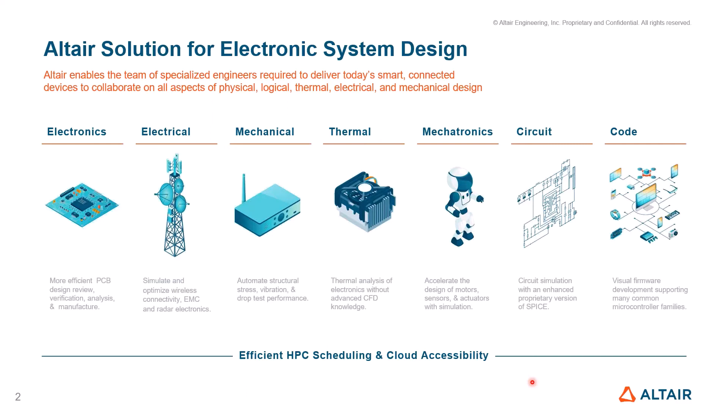On the mechanical side, we can do structure analysis, stress, vibration, drop test, thermal as well with both forced cooling and natural cooling, mechatronics, and circuit analysis through our Activate tool via SPICE coding. And also we can generate embedded coding for controllers. All of them support high-performance computing as well as scheduling and cloud accessibility of the simulation tools that we have.

So focusing mostly on electromagnetics here, we have tools for antenna design, which we're going to cover today, and also antenna placement and coupling, but also virtual drive tests, flight tests for platform and connectivity, even ADAS simulations in automotive, electromagnetic compatibility through cable modeling, radiation, shielding, radio and radar coverage and planning, including scattering and RCS. That's also another webinar we're going to do.

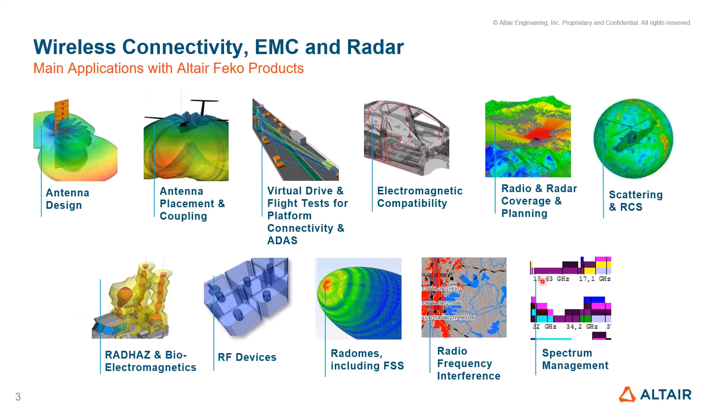The capability includes radiation hazard, bioelectromagnetics, RF devices like waveguide circuits, and radomes including FSS. This will be covered in the radome webinar in this series, as well as radio frequency interference and spectrum management. So you can see that we can not only do very detailed antenna design and placement, but also broader system design using the tools that we have.

The focus today is on antenna placement, which is a very critical thing in antenna design in a communication system. Where you place the antenna could change your antenna radiation pattern. That means your system design should take into account the pattern as it is placed, but also you should find a place where it performs well for your communication requirements.

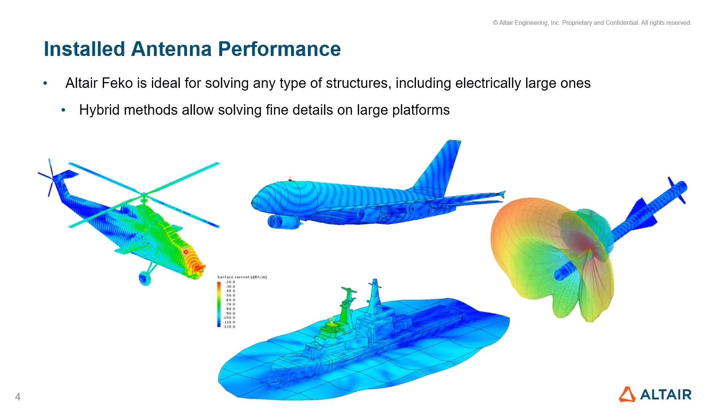Feko has been able to do this right from the beginning. We're an industry standard in antenna placement because of the multiple solvers in the Feko software suite, including FEM, the finite element method for highly inhomogeneous objects, finite difference time domain, method of moments, and MLFMM. These are full wave solutions, but there are also asymptotic solutions like physical optics, large element physical optics, geometrical optics, and uniform theory of diffraction, which are very useful as you go to larger electrical sizes in analyzing radiation patterns.

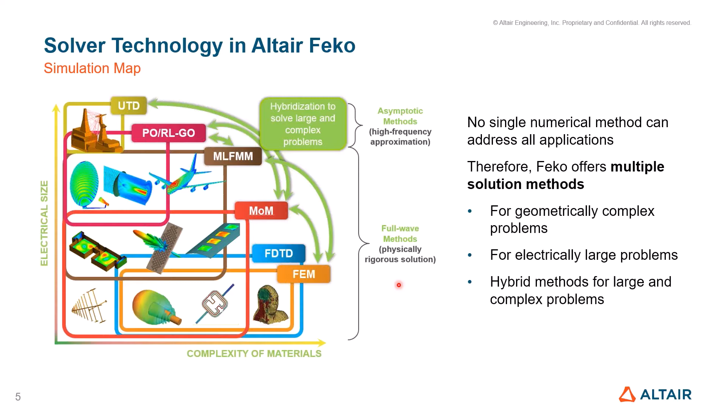They're also hybridized, as you can see with these arrows. FEM is hybridized with method of moments and MLFMM, and method of moments with physical optics, RL-GO, as well as UTD. We also have an iterative method where MLFMM is hybridized with physical optics, so you can use physical optics on one part of your problem and MLFMM for the other part, using an iterative method to converge the coupling between both parts. This is one of our key strengths in the industry, not only for designing antennas, but also for antenna placement analysis.

All our solvers are parallelized on multi-core CPUs and multi-CPUs with shared memory, and large-scale clusters with distributed memory. We also support out-of-core solution if needed. You can see that the scaling done for one of our solvers goes all the way to 960 cores with a speedup of 10 times compared to 60 cores, scaling very linearly over the CPUs and cores.

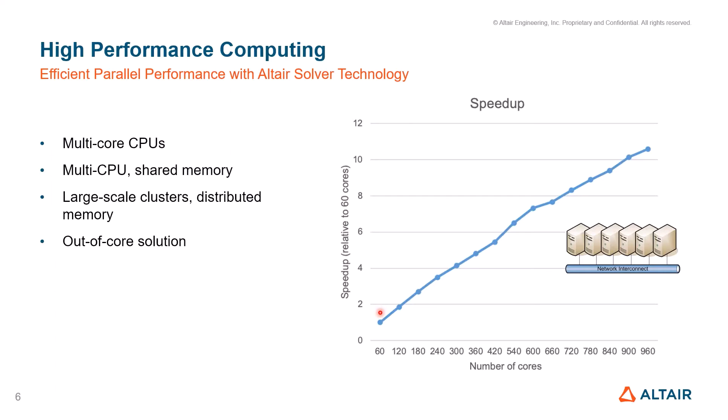One thing that is normally needed for many of our customers is that when the platform models come to them as antenna engineers or electromagnetic engineers, they come from mechanical models, from mechanical people doing the stress analysis and those kind of things. Those models come to us for antenna placement.

If it is not too complicated, we have tools in CAD Feko to fix them, some small things like CAD fixing tools. But of course, if it is too complex for CAD Feko, we have a tool in the Altair portfolio called HyperMesh that can do CAD healing and mesh healing, and can deal with very complicated structures and defeaturing.

We recently introduced in HyperWorks a profile called the Feko profile that, in a way, understands what Feko needs and translates the mesh in a way Feko can read, including the material properties and all those things. So that's an additional benefit we have in Altair.

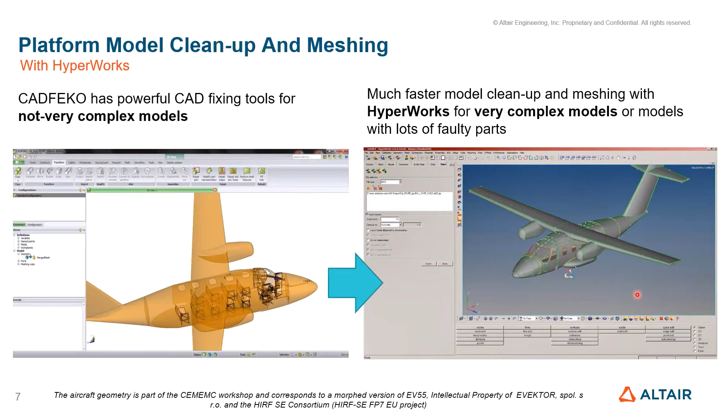Of course, with our licensing system, you're not buying these tools separately. You have access to all these tools at your disposal when you have an Altair license. So this is actually the first step anybody goes through when they have a very complicated geometry, a tool for antenna placement.

And some few examples of how our customers have been successfully using Feko for their platform installed performance. For example, this is from Airbus Helicopters. One of their expert users gave a video testimonial on how they are using Feko to optimize not only placement of antennas for the communication system, but also use of composite materials.

Feko allows for use of composite materials for your platform structures. So how do you place your antenna and also make sure that the antenna works correctly on a composite structure can be analyzed using Feko, and has been successfully done by Airbus Helicopters.

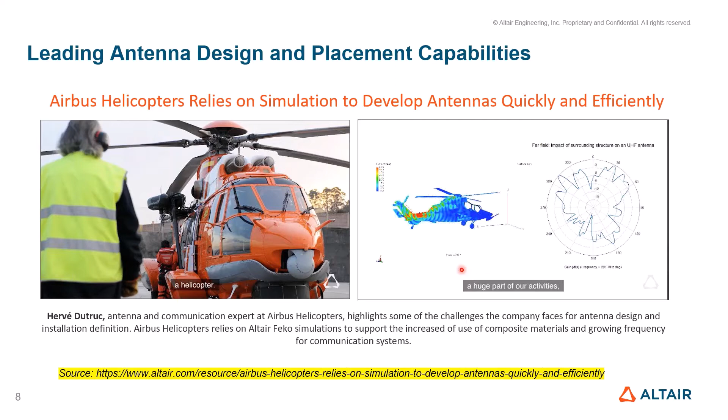Here in the US, at Northrop Grumman, one of our longtime users, Scott Burnside, has successfully used not only Feko but also our other tool called HyperStudy. This can be used for what I can call a machine learning approach for design and optimization, and Scott has been able to do this very effectively for his work.

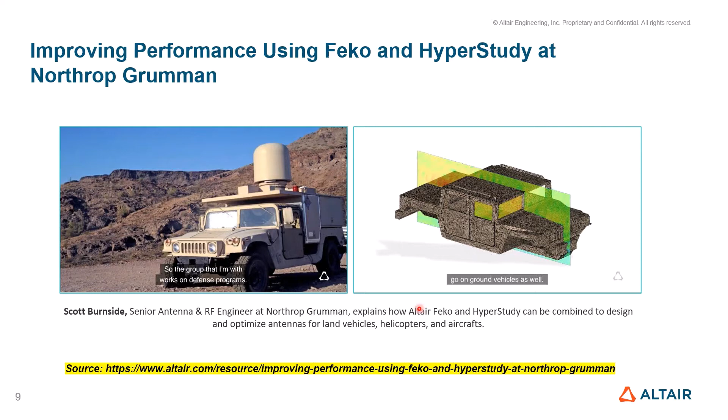And of course, he has given us a video testimonial at this link that you can access. We can share these links with you and also the slides, so you can take a look at these video testimonials.

There's also a paper published in 2012 by Saab on computing radiation patterns using a Feko model, but also doing scale model measurements and then comparing simulations with the measurements. You can see that the blue line here is the simulation and the black line is the measurement, and you can see quite nicely how it is tracking in different planes.

This is the azimuth plane, and a vertical cut, and a vertical cut in another plane here. All of them are validated well by Saab, I guess, with their scale model measurements.

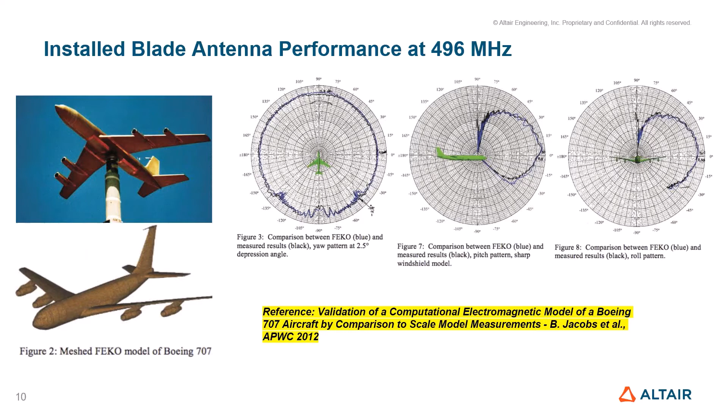Another example is by CNES, part of the European Space Agency, where, in a scale model of a rocket launcher, they took a monopole antenna, and this, of course, is done just for the sake of validating simulations with the measurements, so when they have their real antennas and real obstructions, they can rely upon the simulations.

As you can see, both simulations, that is the blue line, and measurements, the red line, agree quite well in both planes, that is phi equal to 0 and phi equal to 90.

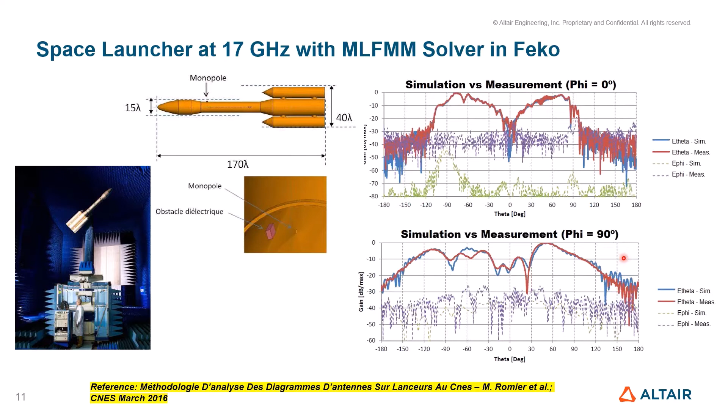A little bit earlier, I guess in 2005, there was a paper at the APS Symposium on placement of an antenna on a large aircraft, done for VHF 126 megahertz, where you can apply both method of moments and MLFMM and compare with the measurements.

In the 1 gigahertz range, they applied physical optics and compared with the measurements. You can see quite nicely how the simulation data tracks with the measured data in this case.

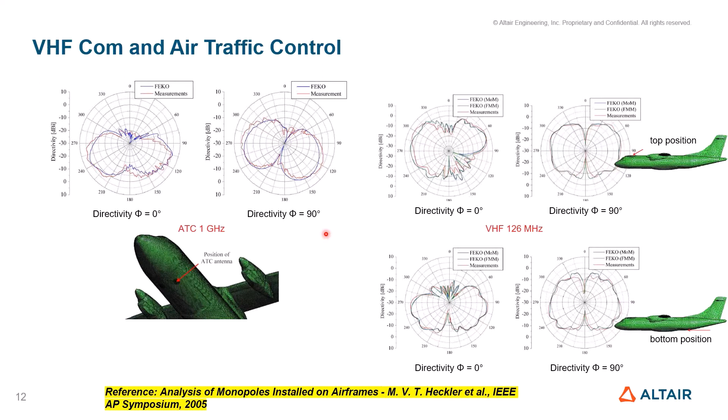So there's a lot of confidence in Feko for antenna install performance in the industry, as an industry leader, I guess, in this area for many, many years.

One of the key things in such simulations, install performance, is a method called the multi-level fast multipole method, which does not make any physical approximations, but has been very effective for electrically large structures in terms of reducing the memory and reducing the computing time.

You can see that we could simulate not only an antenna array—this is around 100 plus antenna elements, microstrip patches—not only the array itself, but also the array on the satellite could be analyzed with MLFMM, which took only 6.6 gigabytes versus close to 1 terabyte with the method of moments. I'm sure we did not do the 1 terabyte simulation, but if we were to, the time taken would be much, much higher compared to what MLFMM would take.

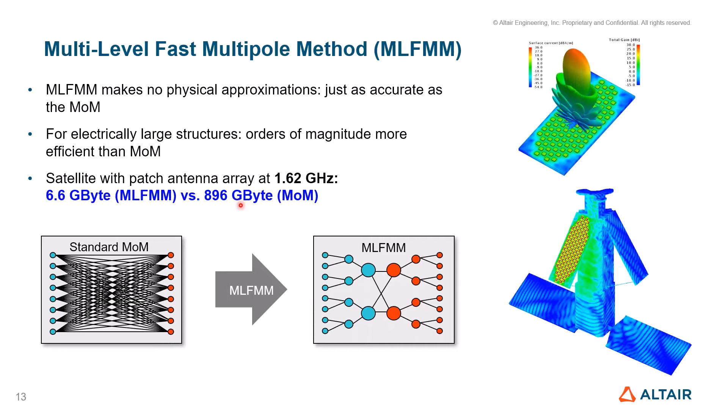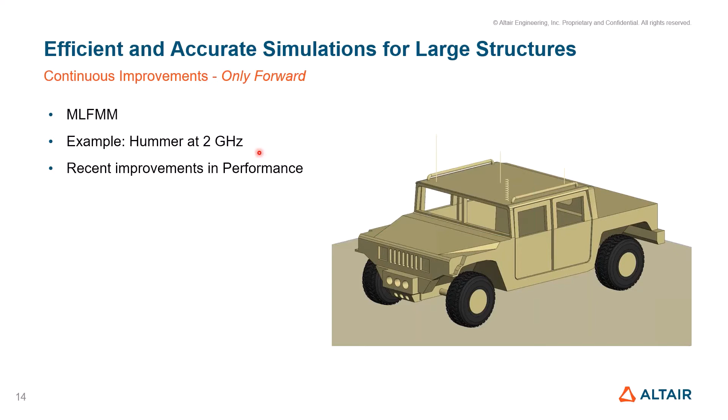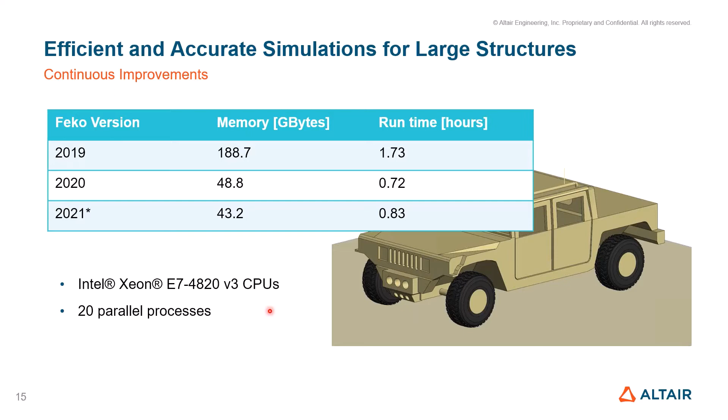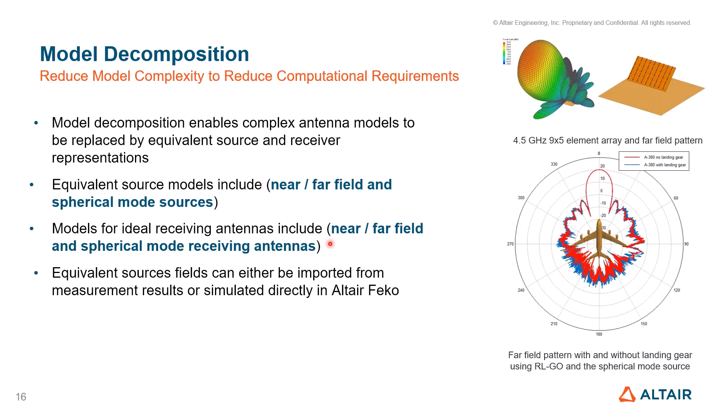Changing gears a little, typically when you do installed antenna performance, you own the platform, but most of the time vendors supply you the antennas. Those vendors may or may not give you the full simulation model of their antenna because of intellectual property limitations and other reasons. So Feko allows you to do model decomposition—meaning you don't need a physical antenna CAD model or simulation model for simulating installed antenna performance. You can use near fields, far fields, or spherical mode sources from the antenna, and use these not only as radiating sources but also as receiving antennas.

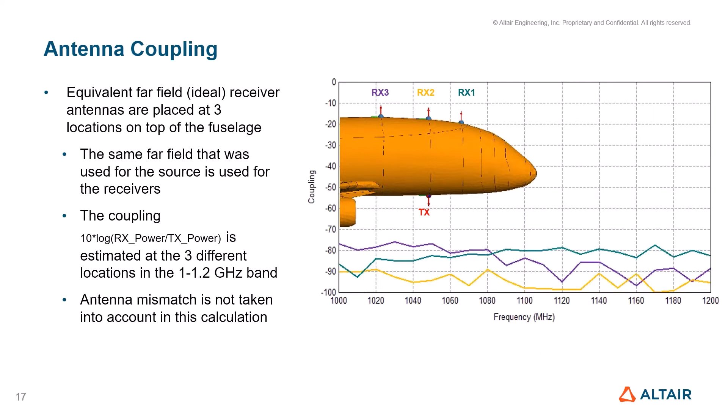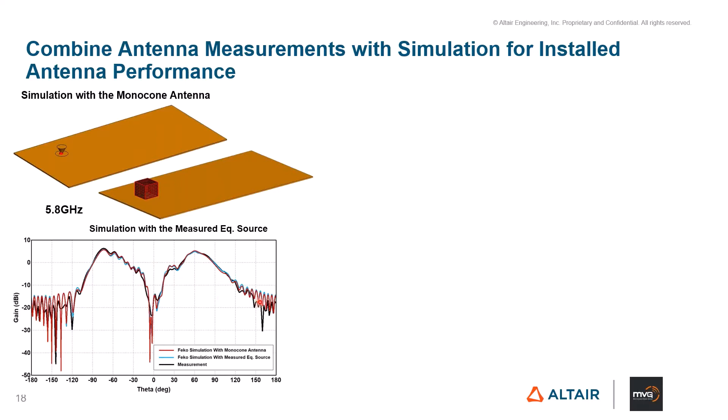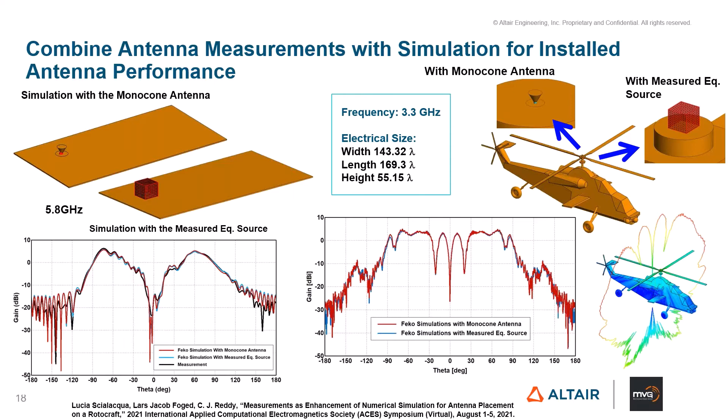Of course, there is another technique that we have in Feko called characteristic mode analysis, CMA, that can be used for placement of antennas or designing platform-mounted high frequency antennas, where the platform itself can become part of the radiating structure because of the wavelength size of the platform. This is a case study done by...

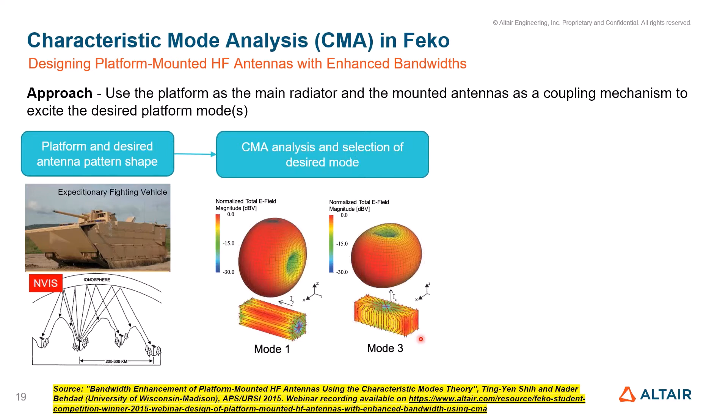Ting-Yen Shih and Nader Behdad at University of Wisconsin-Madison, where they won the Feko Student Prize Award for this one. There is a webinar available where you can watch the complete presentation. Essentially, they took the vehicle, computed the characteristic modes so they could decide where to place the antenna, so that the complete structure—not only the antenna by itself, but also the whole vehicle—can radiate what is needed for this application, the NVIS application, where it has to look up in the sky for the reflection from the ionosphere and so on. So that's also available in Feko for this kind of calculation.

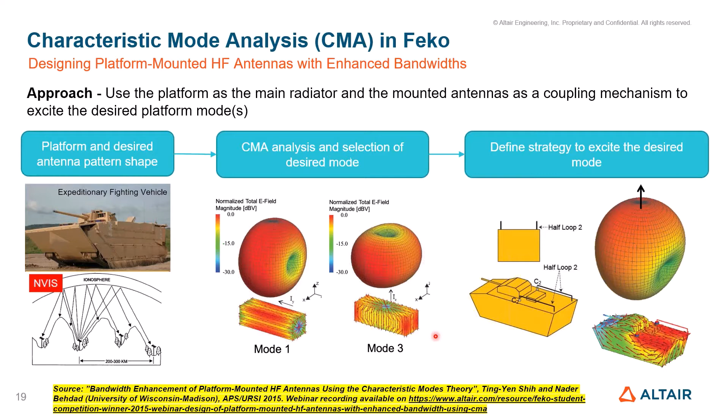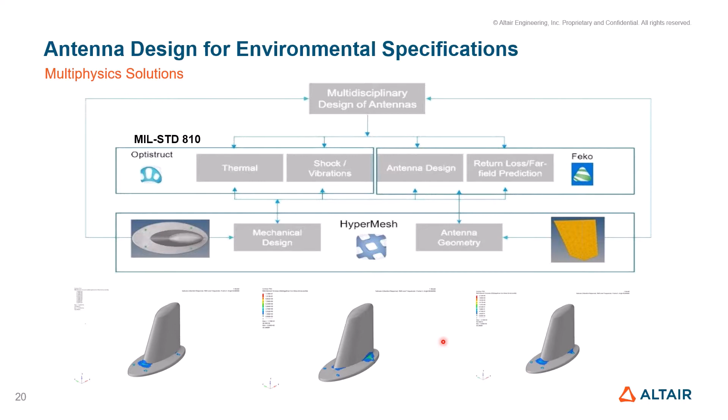As I mentioned earlier, because of our licensing system, if you have access to Feko, you already have access to these tools as well to do further analysis. It may not be you as an antenna engineer, but your mechanical counterparts at L3 Harris.

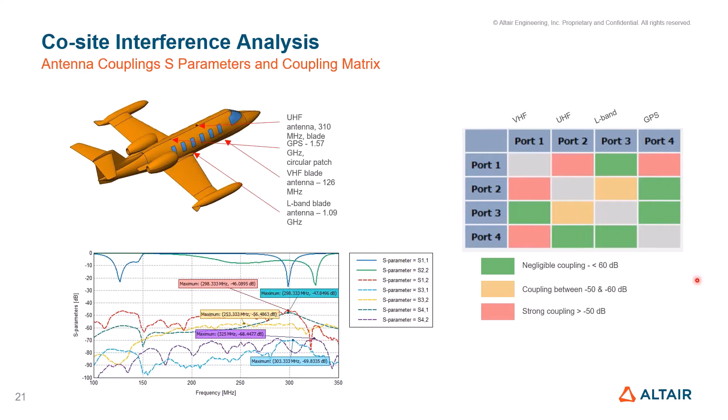That's what we've had for a long time, but recently, about a year or two ago, we added a technology called WRAP. WRAP is a propagation tool that can also do co-location interference analysis, and we extended that to platform co-site interference analysis. WRAP can take into account intermodulation products, IF breakthrough, image frequency, harmonics, transmitter spectrum, receiver selectivity, and receiver blocking—all of them—and also communication protocol spectrum is supported for this kind of calculation.

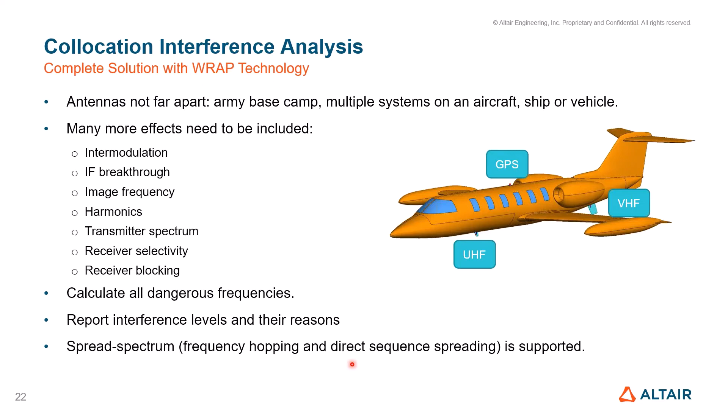As an example, you have a GPS antenna on top and COM antennas on the bottom. We can compute the adjacent channel or co-channel interference it can give you. So basically what you do is compute the S parameters of these three antennas in Feko and bring them to WRAP as what we call a coupling loss matrix. In WRAP terminology, S parameters are translated to coupling loss, and that can be input.

From there, WRAP has some equipment specifications already filled in, but you can also put in your own equipment. If you have a GPS receiver, or a COM transmitter and receiver, you can put in those values, and we can compute the co-channel interference with a margin. Of course, the higher the margin, not good—the more negative the number, the better.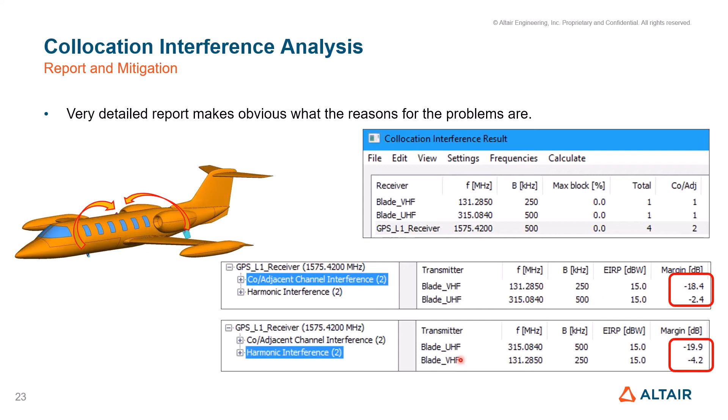So we can compute between various receivers here and the transmitters and so on and so forth. So that takes you one step further to what is actually needed. Though I have not presented here, maybe we can look at it later on when Raja demonstrates, is the filtering of the transceivers. So that's also possible in WRAP. You can put a filter and then see in simulations how well this interference can be mitigated and the margin can be improved.

So as I mentioned, we can also do interfering signal level analysis. Typically, this is done for propagation, where you have an area where multiple transmitters and receivers are there. But you can also replace the propagation calculation with the results from measurements or Feko and other tools as well into this to compute the interference signal levels, and also beyond that intermodulation products, harmonic levels, and those kind of things.

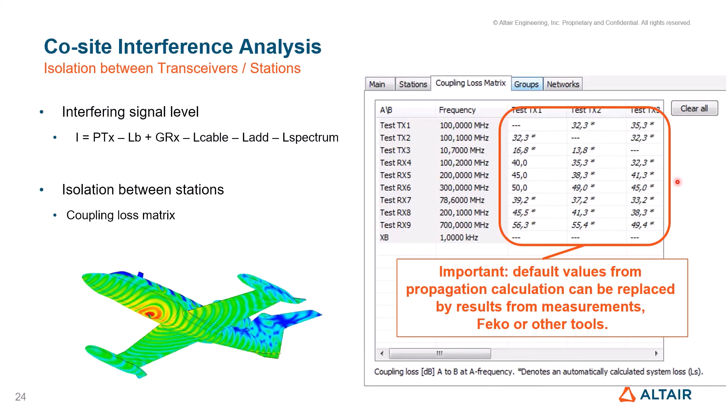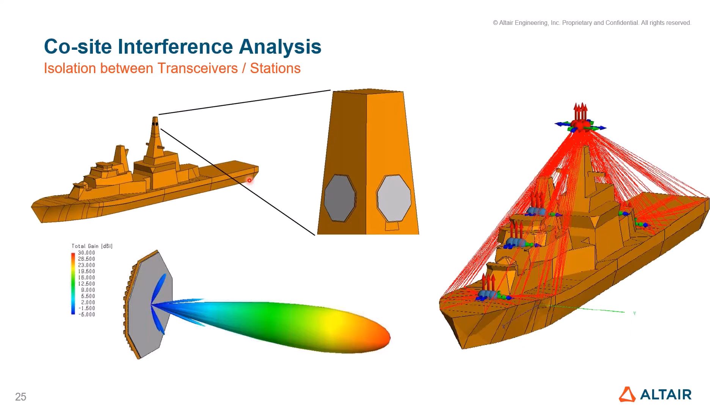With that, that's kind of my presentation. I want to leave enough time for Raja for demonstration of the co-site interference analysis, and he will be doing a ship-based co-site interference analysis, not only from the Feko side, but also more importantly on the WRAP side. How do you do this further analysis with the transceivers and those kind of things? With that, I hand over this to Raja for the demo.

Let me unshare my screen. Raja, you should be able to share your screen. Sure, Dr. CJ. Sure. Hope you could be able to see my screen. Please let me know. Yes. Yeah. Yes. Thank you, Dr. CJ. Thanks for the nice presentation, Dr. CJ,

and it's really good with all the antenna placement studies with respect to the simulations and measurements. And now I would like to present a short demonstration on the antenna placement and co-site interference analysis. In this particular demonstration, I will be using the CADFEKO and POSTFEKO tools, which are the modules available in Feko. And also I'll be using the WRAP software to calculate the co-site interference from the S matrix, which we obtain from Feko. Let me start setting up the model in Feko over here.

I'm going to launch CADFEKO. I have my CADFEKO launched over here. I would like to import the model. I assume that I got it from my vendor or some mechanical department. I would like to import a ship model into my CADFEKO session. You can import the geometry, you can import the mesh, and several formats are supported. You can see over here in importing the geometry, a lot of file formats are supported: Parasolid, IGES, ODB++, and a lot of other file formats.

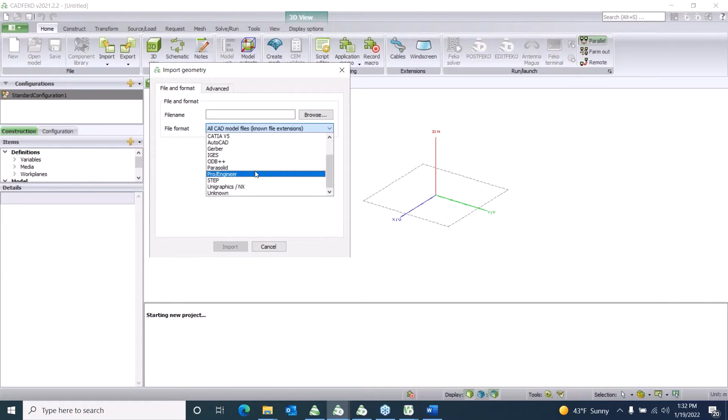I would like to bring a Parasolid ship model onto my CADFEKO session. Okay, I have my ship model available, and let me import it. Of course, if you have any issues with your meshing, as Dr. CJ mentioned, you can take this model into HyperMesh, clean the geometry, and bring it back here. If it is very simple mesh issues, definitely you can treat those issues inside Feko itself.

And as usual, this is very important. We go in the workflow all the time from left to right. In setting up the model, we use the construct and transform tabs for creating the geometry. Here in this particular case, we imported the geometry. The source/load tab we use for the excitations and frequency setup. The request for the output parameters, like far fields, near fields, currents, etc., we do using the request tab. Then mesh, which we just spoke about. Then we go to solve/run for any solver settings, and then we can use the Feko solver button.

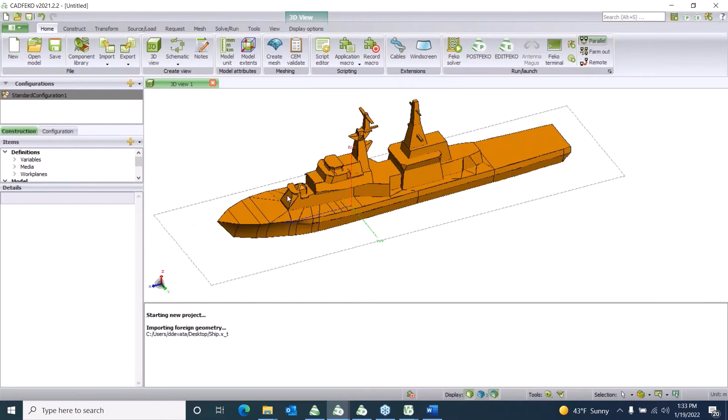Okay, as I told, I imported my geometry into CADFEKO, and let me assign a few things to it. I would like to define the media over here. I would like to go to the construct tab and define a media, so that I can assign these media properties to the ship and the seawater appropriately.

First thing is my seawater. I would like to use a seawater dielectric medium. I know the dielectric permittivity of this particular seawater is 80, and also the conductivity of this particular seawater is 4. I will show you appropriately. I would like to tag this particular thing to the surface.

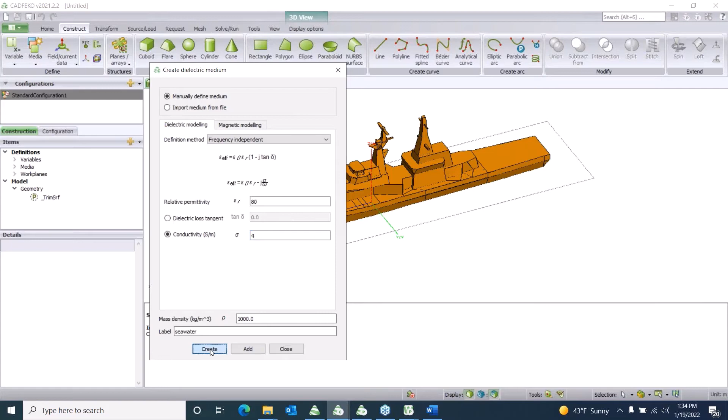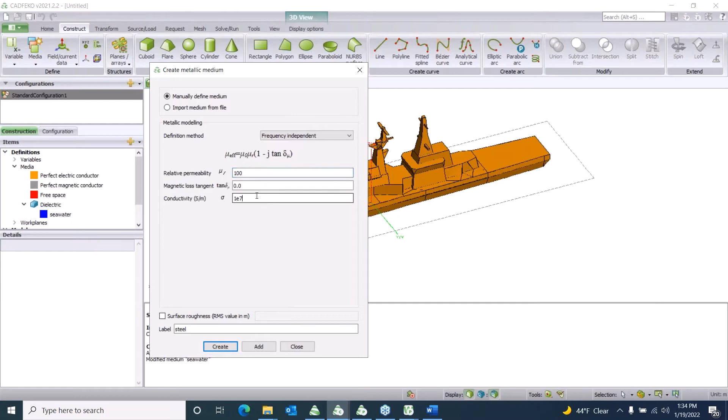Okay, then I just wanted to change the display color so that it will be blue, because the sea will be in blue color. I would like to use the dark blue over here. Then the next thing is I would like to bring the other media property, steel, that is available over here. Of course, I'm going to define it again, and I have the steel metal property, so that 100 is the relative permeability of this particular steel material. And of course, I do have the conductivity 1e7.

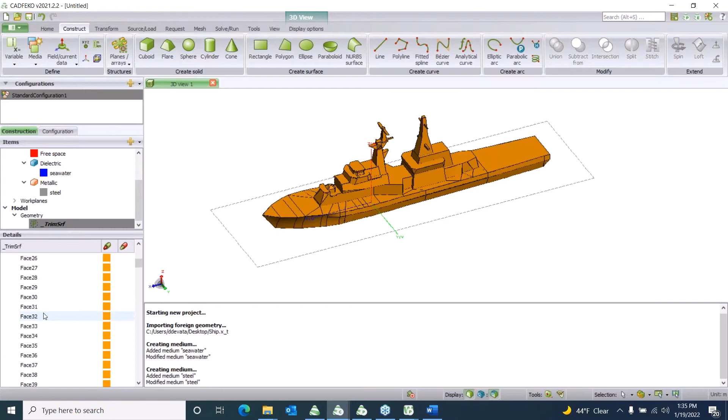I do have the steel, and again, I would like to change this particular color so that it will be elegant. I just need to use a little bit, it will give much brighter visualization. Okay, I have my steel material available. I would like to assign the faces of this particular ship to the steel material. Let me choose all the faces of the ship and let me assign them to the steel material, of course, which is having a finite thickness. I am going to apply this so that I have a ship with steel surfaces.

Then I would like to have the sea surface. Because usually the ships are going to go on the sea surfaces, we have two options that are available in Feko. You can do either a rough sea surface or a smooth surface based on your choice. Both the options are available. Here in this particular case, I will be using a smooth plane surface of the water.

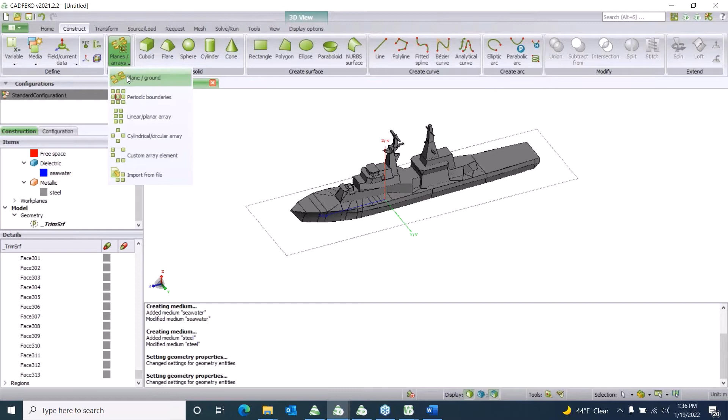I will go to the plane or ground. Then I would like to assign homogeneous half space in Z less than 0. And of course, it's automatically tagged with the seawater. You can see over here the medium is seawater. That means we got a ship and we got a sea surface.

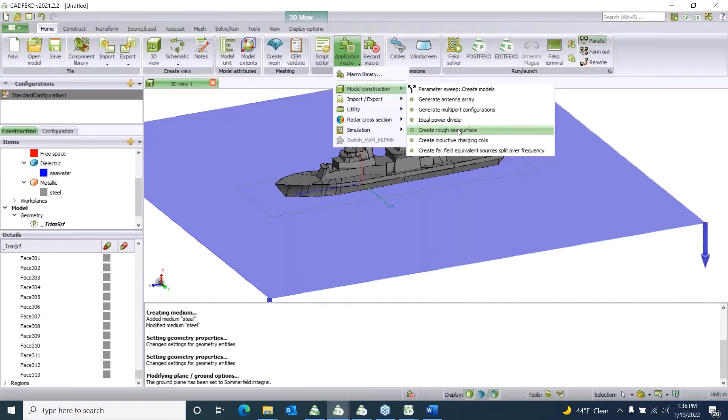Then in case you would like to use the rough sea surface script, it is available in the home tab under application macro library and model construction. You can see over here, create rough sea surface. One can use this particular script to create the rough sea surface. I'm not doing that, I'm just telling you that this is available.

Once we have this ship and the seawater model available, I am ready for the antenna placement. I'll be choosing 3 different monopoles, and I would like to place them at different locations. I already calculated and chose the frequencies to be in the megahertz range: 3 megahertz, 6 megahertz, and 9 megahertz.

Let me go to the construct tab, and I would like to use the line symbol over here, with the height for 3 megahertz. I already calculated my dimensions. The length of this particular monopole is 23.6 meters, and I would like the position of this monopole to be over here. I already had this location, I just wanted to tag it appropriately. I'm going to copy and paste it so that it will be much easier. Okay, I got my first monopole.

Let me keep the second monopole at a different location. My second monopole is working at 6 megahertz and the length of this monopole is 11.68 meters, and my locations are work plane locations on the ship. I just chose some random locations so that they are appropriate with respect to their positions. And I'm going to place the second monopole.

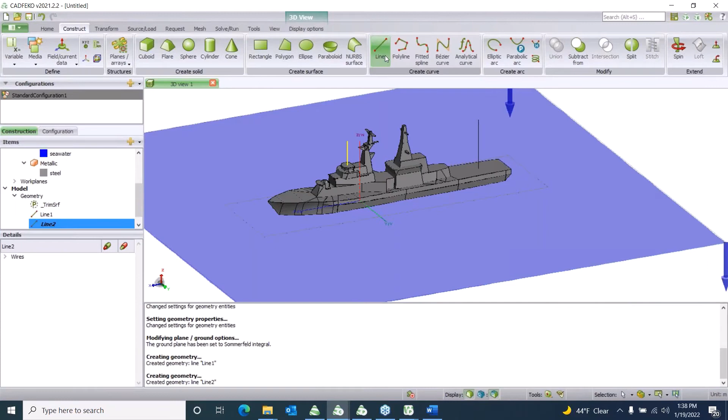Similarly, I'm gonna keep the third monopole in front of the ship. The length at 9 megahertz is approximately 7.8 meters, and the work plane coordinates are: X coordinate is 33, Y coordinate is 0, and my Z coordinate is approximately 7.3. I'm gonna copy it. Okay.

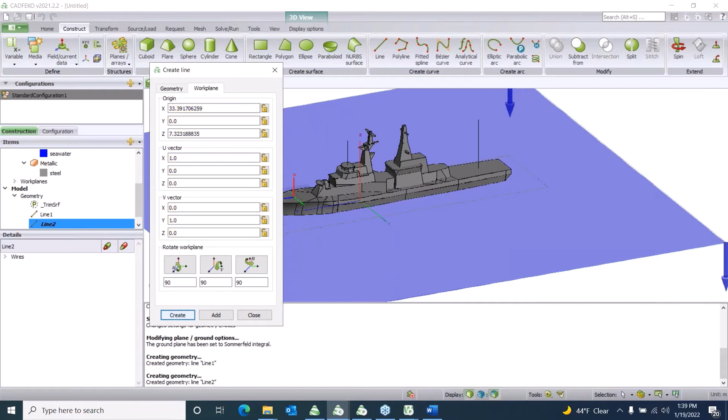Once I define my monopoles over here, you see I got the 3 monopoles that are available at 3 megahertz, 6 megahertz, and 9 megahertz. Let me first union them so that all these things will be available for me. I'm going to perform the union operation that is available in the construct tab, and I union them. Okay, I do have all the 3 wires.

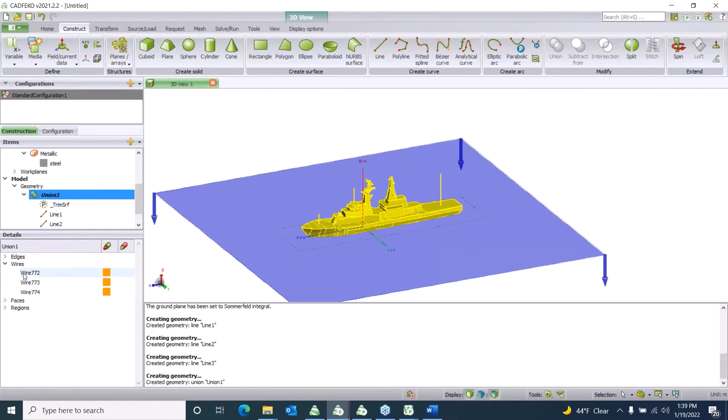Now I need to make this 3 megahertz monopole work. I need to tag it with a port and a voltage source. Let me select the wire 772 and create port 1. Similarly, let me select the wire for the second monopole antenna, which is working at 6 megahertz, and tag it with a wire port, port 2. Then let me go to the third antenna and create wire port 3. Okay, 3 antennas were there.

And I can tag port 1 to the source. As I told you, I need to tag this to a voltage source. Let me create a voltage source over here. You can right click and choose voltage source, create. Otherwise, you can go to the source/load tab and access the wire ports and voltage sources as well. Since it is really handy, I'm accessing everything in the model browser. I can go to the frequency and assign it; I know this will be working at 3 megahertz.

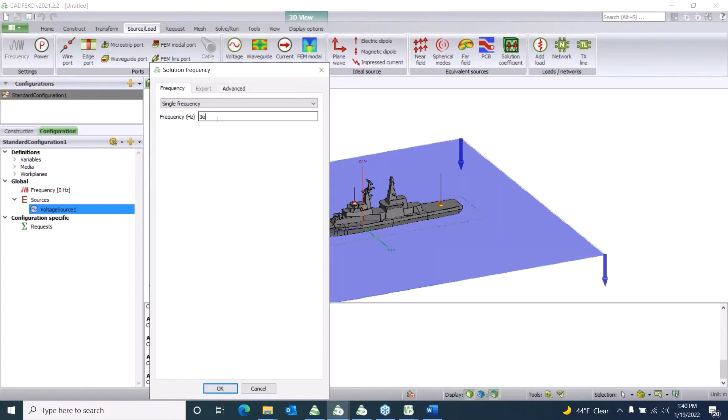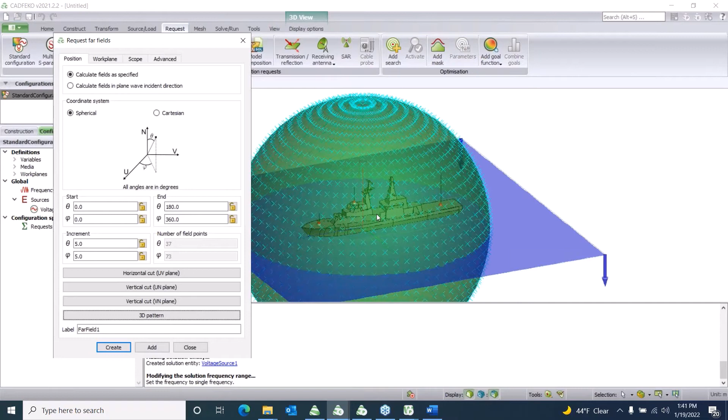Click OK. And what did I want for this monopole antenna which I placed on the ship? I wanted the far field pattern. Let me select the far field over here, 3D. I want to offset this far field pattern because it is located at the origin. I want to use the offset coordinates where I kept the antenna.

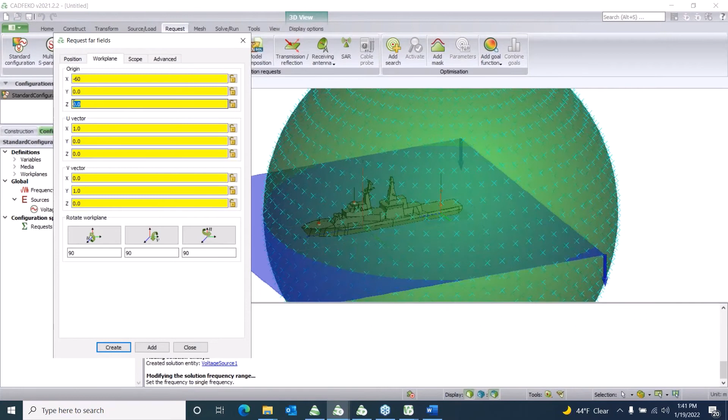I have minus 60, then 0, and my Z coordinate is approximately 5.5. These are the coordinates for my far field pattern, so whatever far field pattern you compute for 3 megahertz will be available to you. Just hit the create button. Very simple. Now I would like to do the same for 6 megahertz and 9 megahertz as well, in the same setup without going anywhere.

And also I would like to request the S parameters so that I can compute the coupling between these antennas: 3 megahertz antenna with respect to 6 megahertz antenna, 3 megahertz with respect to 9 megahertz antenna, similarly the 6 megahertz antenna with the other antennas, and the 9 megahertz antenna with the other antennas as well. Look at this, this is very interesting and very critical. Let me copy this configuration and do it for 6 megahertz and 9 megahertz.

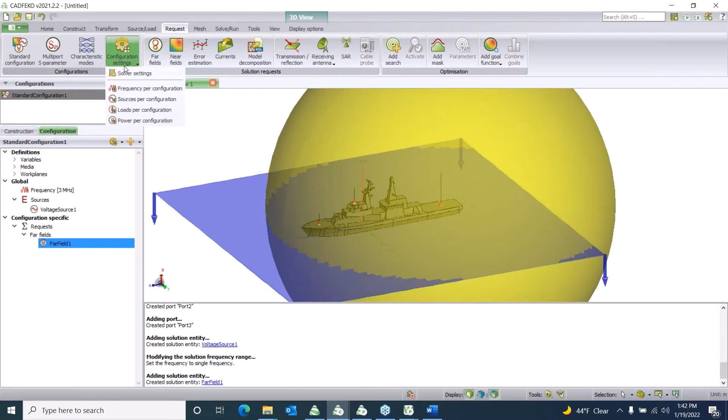Before doing that, I would like to make the configurations specific so that you can do every simulation in this one chunk rather than going outside of this CADFEKO session. We are going to select frequency per configuration, sources per configuration, and loads per configuration, in case we are also using power configuration. That means everything is unique to its own configuration. Let me rename this as 3 megahertz, so it will be easy for our understanding.

The next thing was the currents. I would like to request the currents for this ship. I go to the request tab and request the currents. Not only the far field pattern, I would like to see how the currents will be distributed at 3 megahertz.

As I told you, I would like to set up the same thing for 6 megahertz and 9 megahertz. I duplicate this configuration, and I have it as 3 megahertz underscore 1. I rename it as 6 megahertz, which means I am computing the analysis for 6 megahertz. Let me change the frequency over here to 6 megahertz.

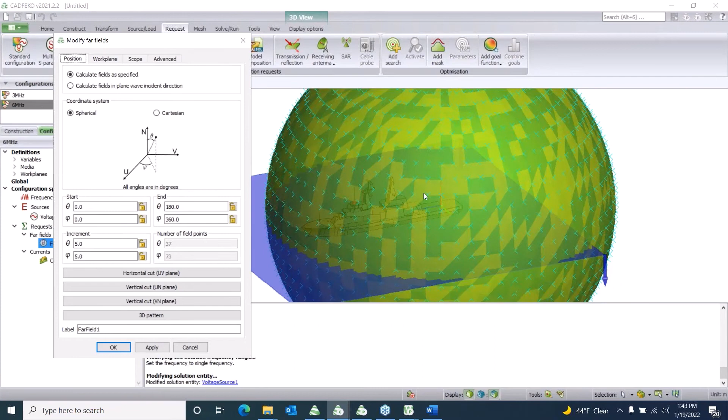Okay, and I would like to tag the appropriate voltage port to this particular thing. I would like to tag the port to port 2 because this is the one which is going to work for us. Apply. And I want to change the far field pattern as well. Far field pattern for this 6 megahertz is over here. I would like to shift this particular thing to the appropriate coordinate.

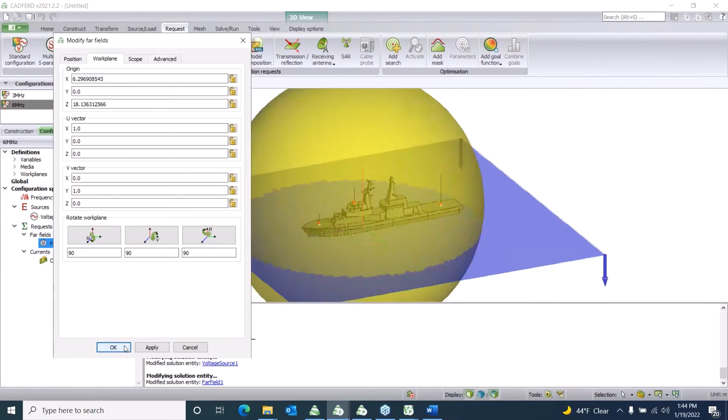What are my coordinates? 6.3 is my x coordinate. And similarly, y coordinate is 0 and z coordinate is 18.13. Okay, I have all my coordinates available for my 6 megahertz application. Similarly, currents for 6 megahertz are calculated.

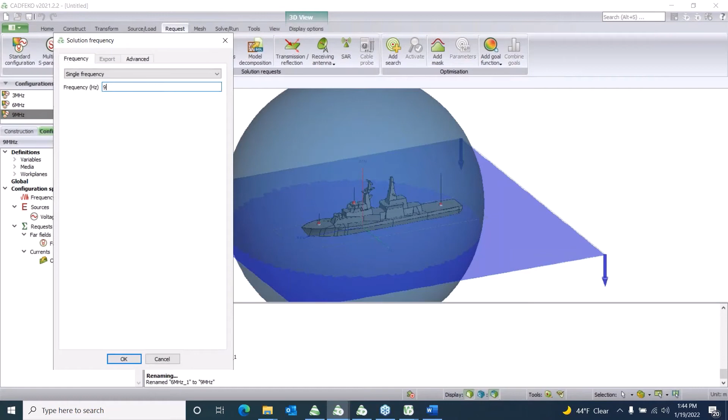Then I would like to do the same thing for 9 megahertz. Copy, duplicate, and let me rename this as 9 megahertz. And we have the problem set up for 9 megahertz as well. Once I do have the 9 megahertz, I'm going to choose the frequency as 9 megahertz over here. Then I would like to change the far field work plane coordinates to be tweaked appropriately based on the antenna location so that they will be visible appropriately.

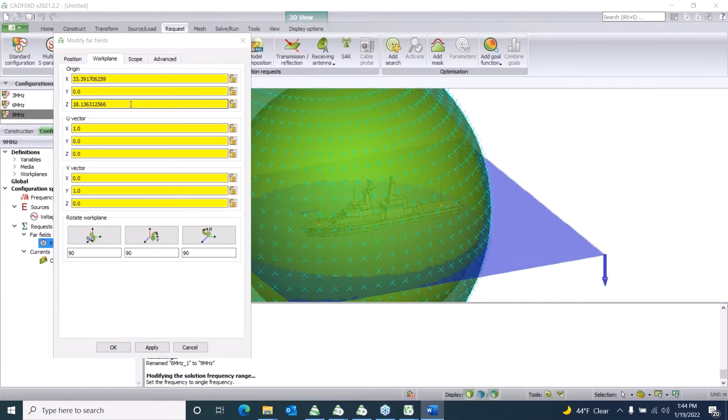Okay, I got the 33, and for the y coordinate it is 0 and the z coordinate is approximately 18.13. I would like to get that particular thing approximately, and you see over here all these things were placed appropriately. And last but not least, we do have the antenna locations and far field patterns. Once we place the antennas, we could calculate.

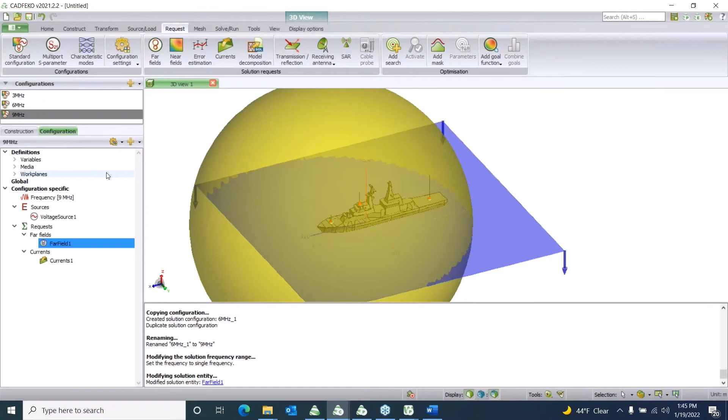As I mentioned, I would like to calculate the S parameters, which is very important for the collocation interference. I would like to use this particular S matrix values for further analysis for cosite and interference analysis purposes. Let me request the S parameter matrix as well. You go to the request tab and go to the S parameters.

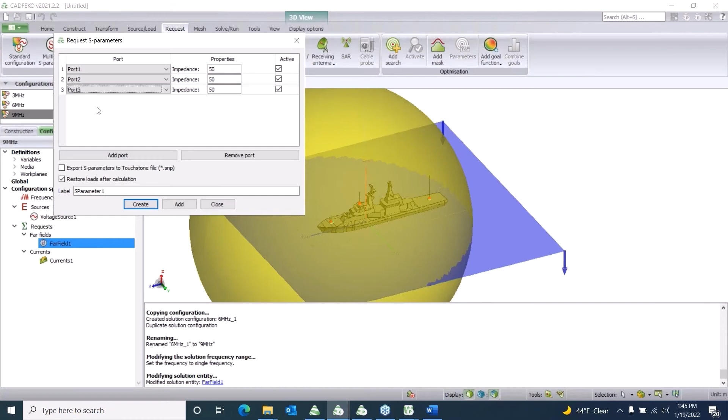Okay, I'm going to go to the add port. I would be choosing the port 2 and port 3. Okay, I have port 1, port 2, and port 3. I can get all the 9 elements, diagonal elements and off diagonal elements, and I can get all the coupling elements as well. Create. Okay, I do have all the necessary things available.

For the S parameters, I would like to choose from 3 megahertz to 9 megahertz. Just for the time being, I'm choosing 3 megahertz to 9 megahertz as a continuous sweep so that it can get the S parameter coupling values for all these frequencies. Okay, this is how we are going to set up, and then let me save this particular model on the desktop, or I can give it as a demo one.

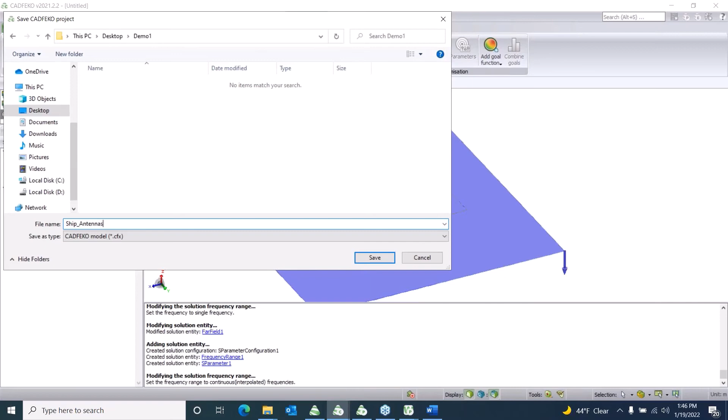And let me save this particular thing as ship antenna placement, right? Ship and antennas. I'm going to keep the name as ship and antennas. Okay, once I have this available, as I told you, I can go to the solve or run tab, use the Feko solver button, and look into all the results. Yes, we'll just hit that. It will take a little bit of time, but I already solved that particular model.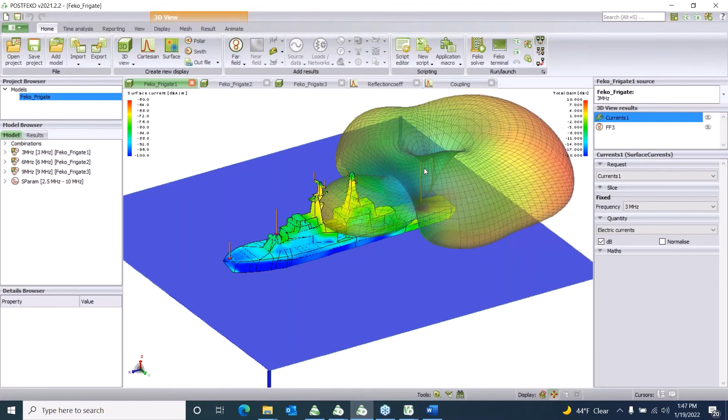I'm going to open that particular thing and you can see over here all the currents and the antenna pattern are available at 3 megahertz. You can see over here the currents we requested on the ship. Similarly, the radiation pattern. And for the 6 megahertz antenna, we also computed the far fields and the currents at 6 megahertz. Similarly, for the 9 megahertz, we were able to compute the radiation pattern and the currents as well.

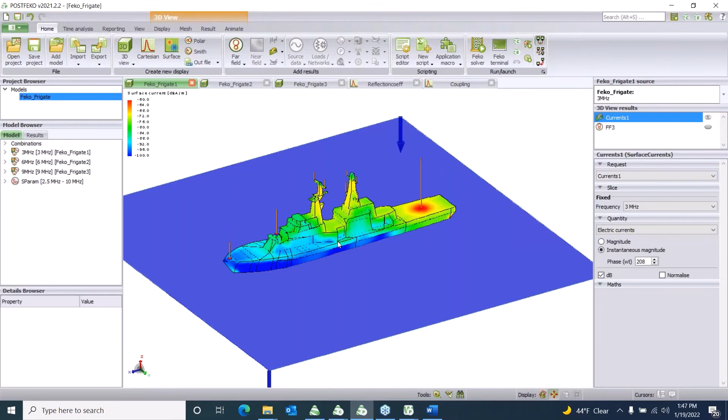Okay, I would like to animate certain things so that we can see the effects of the currents on the ship over here. I just deactivated the far field, hid that particular thing so that we can see the current effects on this ship. Let me go to the animate button and choose the phase so that we can observe the phase variations of the current on the ship because of this particular monopole antenna.

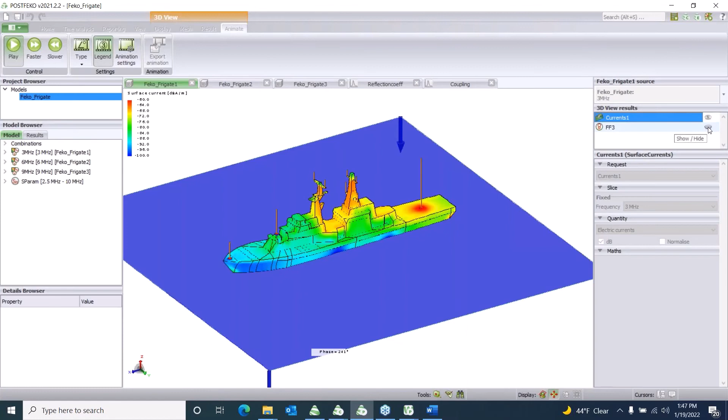Okay, that is really cool to see this particular thing visually. Then I can jump on to look into the S matrix, which is very important. You can see over here, as I requested the S matrix, from 2.5 megahertz to 10 megahertz. That's what I calculated.

I was able to get all the S matrix elements over here, S11, S22, S33, and also you can plot the off-diagonal elements. You can see over here all the 9 elements are available for us from this particular simulation. We can use S11, S12, all the things that are available. We are going to use these S matrix off-diagonal elements, and then we are going to go to the coupling matrix, take this coupling matrix information and punch it into the co-site interference. You can see over here the coupling.

As I told you, S31, how the first antenna is getting coupled to port 3. Port 1 to port 3. That means 3 megahertz is radiating and 9 megahertz is receiving. How it is working, that's what we would like to compute. And then let me show one more thing over here before jumping into this co-location interference.

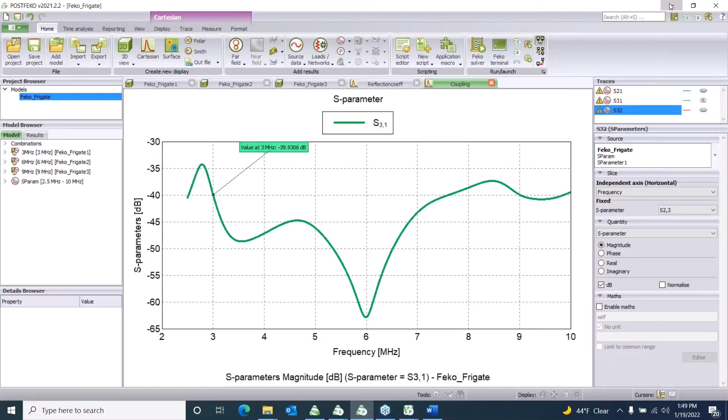You see here, as in one of the slides Dr. CJ was talking about, in the application macro there is a script available for plotting the S matrix interference. You can see over here in the macro library, S parameter calculators, you can plot the interference matrix as well inside Feko without going there. In case you would like to do the coupling levels and all, you can do that over here in this post Feko script itself. I'm not doing that, I'm just telling you that the script is available for calculation purposes.

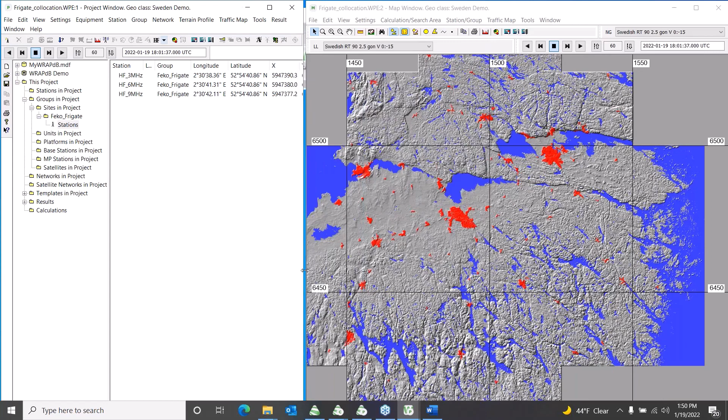Then let me go back to the WRAP software that is available over here. Since I already set up everything over there, I just would like to demonstrate the things for you. WRAP basically comes with 2 windows. One is the project window and the other is the map window. In one we can see things graphically and in the other we can punch in everything. Let me tweak the window so that you can see these things perfectly. You can have this information in both the map view and the project view.

Whatever you do, you can do it over here. All the calculators and everything are available in the project window. In the map window, you can graphically visualize where you should place the antenna and stuff like that. Then let me go back to the project window and describe the problem. We did calculate this S parameter matrix from Feko. We got the radiation patterns, we got the currents, we got the S parameter coupling matrix.

We need to have the connection now between the S parameter matrix and the CAD Feko session. Then let me go to the Feko sites, and this is how we are going to set up everything. This is what you can see over here. I have the coupling matrix, which I got from Feko. I entered all the things over here. And then I have the stations, 3 stations you can see over here.

I have the 3 megahertz antenna. And of course, I will have the location values. You see here, where do I need to place this antenna? You also have that provision, and the frequencies and the transmission information, everything is available. Similarly, for 6 megahertz, you define the location, the transmitter equipment information, the frequency information, everything. I'll just follow the same procedure for 9 megahertz. I have the 3 antennas placed on this particular ship.

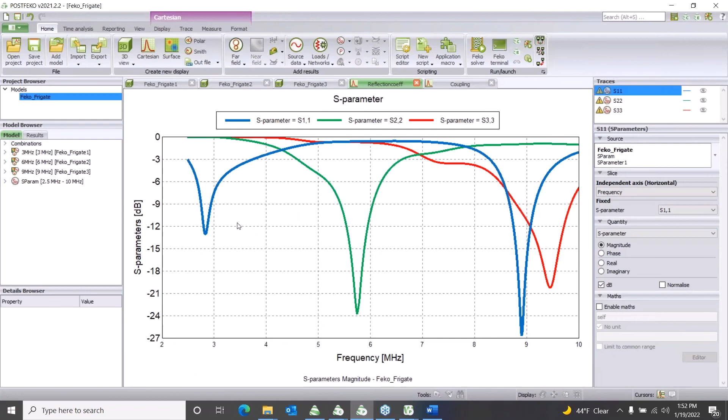If you don't take the S parameter values, basically once you use this tool, based on the locations and all the things, it can calculate its own inbuilt coupling matrix. But we are not interested in that. We are interested only in the values we got from Feko. We will be taking these parameters and punching them into this coupling matrix over here. I already had those parameters, as I told you. I entered that information in the coupling matrix over here.

Once I enter this, I can go to the tools tab in the project window and hit collocation interference. It can calculate the adjacent interference, the harmonic interference, and apart from that there are a lot of other components it can measure. As a topic of interest, we will be talking about the adjacent interference and the harmonic interference.

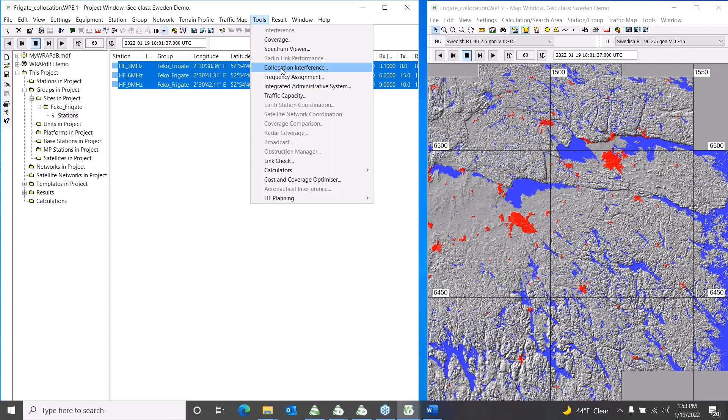Let me perform the collocation interference and see how they are getting interfered. Let me select all these things and go to calculate interference. It is going to do the job for us and provide how the interference elements are going to interfere.

I opened the 6 megahertz antenna. It has a co-site adjacent interference from the 3 megahertz antenna and the 9 megahertz antenna. Let me look at the values: from the 3 megahertz antenna I got minus 8.0 dB, which is the parameter that decides how effectively it is affecting the antenna. And for 9 megahertz, I got 9.8.

Let me check for the harmonic interference. We got a big number like minus 59, which is not acceptable. We need to take an action over here by adding some filter or something like that at this particular 3 megahertz. Let's see how the 9 megahertz antenna is behaving.

Similarly for the 9 megahertz antenna, I have the co or adjacent channel interference values from 3 megahertz like this, and from 6 megahertz I got minus 10.5, and also the harmonic interference as minus 4.5. The harmonic interference values are really high, which means we need to take a step. You can add equipment like a filter, or come up with your own plan of action.

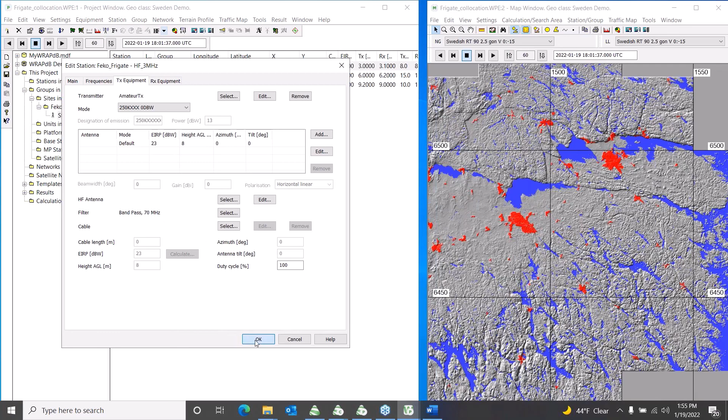I have this antenna filter brought into the antenna profile, so I have a filter and then the antenna, which can help eliminate the harmonic interference. That's the filter I added over here. Let me click OK, and we'll do the same analysis again.

Let me select the 3 antennas, go to tools and perform the collocation interference, and calculate interference again. I have the 6 megahertz antenna, let me look for the harmonic interference, because earlier it was almost minus 59.5 — it got reduced to minus 8.5. Similarly for 9 megahertz, it got reduced to minus 8.

That's how we can eliminate or minimize the harmonic interference by adding equipment to the antennas. That part can be easily done using WRAP, the collocation interference module available inside WRAP. WRAP itself is a very big software with several modules, but since the topic of interest is collocation interference, I wanted to present this particular thing.